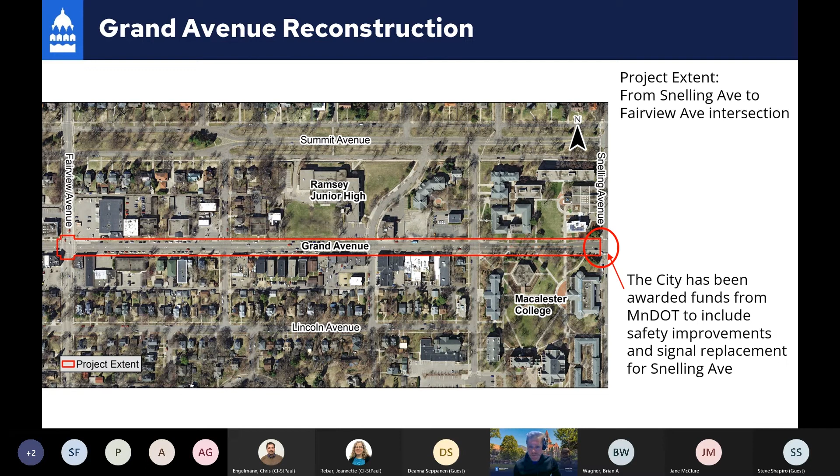Real quick, back to the basics again. I just want to retouch on some of the project needs and goals for why we are doing this project at this part of Grand Avenue.

The project need—one of the bigger drivers—is the low pavement quality throughout the project extent. Part of this project goes through Macalester College, and part of the street roadway there was failing a few years ago, so we did a quick fix on some parts of this section because of the failing state of the roadway. So we're coming back now to do reconstruction, a more permanent fix of some of this roadway that is very poor throughout the project extent.

Another big driver of this project is very high pedestrian activity and pedestrian safety, specifically through the corridor. Looking at Macalester College, we'll see some of these numbers, but pedestrian activity through Macalester College is very high, much higher than a lot of other areas of the city. That's a big driver of why we're looking at this part of Grand Avenue to start our reconstruction process for the street.

Also, of course, there's aging underground infrastructure. A lot of the infrastructure—water pipes, sewer pipes, electric wires, fiber, anything underground—a lot of that's really aging, and it's time for the city to come in and replace a lot of that. Specifically, water and sewer pipes have been there potentially for 50, 60, 70 years at this point, so it's time for the city to come through and start replacing and repairing this underground infrastructure.

Some of the project goals we're really looking to get out of this: we're really looking to improve safety along the corridor. Grand Avenue, we did a safety study with MnDOT about 6 years ago, and Grand Avenue is one of those corridors in the city identified for infrastructure improvements to improve safety, and that's a big driver of what we're doing here today.

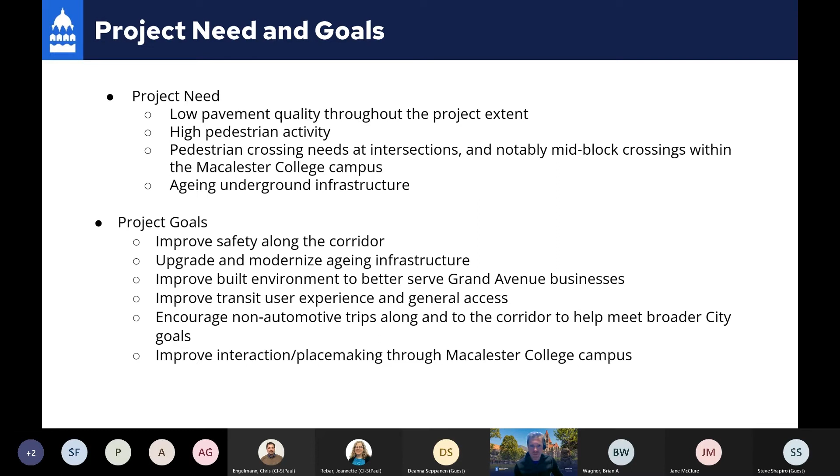Finally, as we talk about Macalester campus specifically, we're really looking to improve the interaction and that placemaking idea through Macalester's campus, and help Grand Avenue become part of campus rather than being a barrier, as many students and people perceive it as today.

A little project background: moving to what we've done so far to get to this point. Our phase 1 engagement ran from about March to July of this year, and included multiple meetings with corridor stakeholders, including Macalester College, Hidden River Junior High on Cambridge Street, Metro Transit, MnDOT, and area businesses. I've met with many area businesses through this process as well, and we also held our first open house in June, which had members of the public attend, similar to today.

We've also done online surveys and interactive mapping tools in this first phase. Those surveys saw about 260 responses to our general survey, getting general ideas about how people use and want to use Grand Avenue and what they want to see for its future. We got 60 Macalester students specifically responding to a survey about the crossings at Macalester, and about 150 interactive mapping tool responses, letting residents drop pins on a map to say exactly what the issue was or what they liked about a certain aspect of the corridor in a certain location.

All in all, through all these activities—in person, online, virtually, small meetings, large meetings—we got over 500 members of the public to engage through this initial phase of the process, and that really did help drive the look of the concept plan you'll see in a little bit.

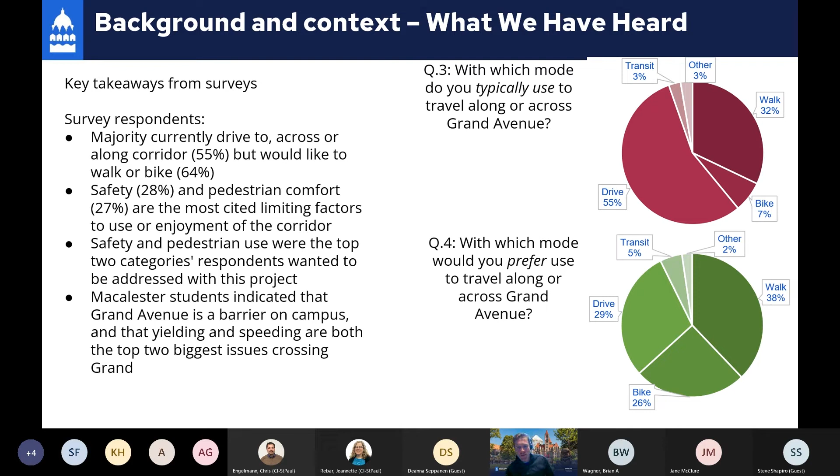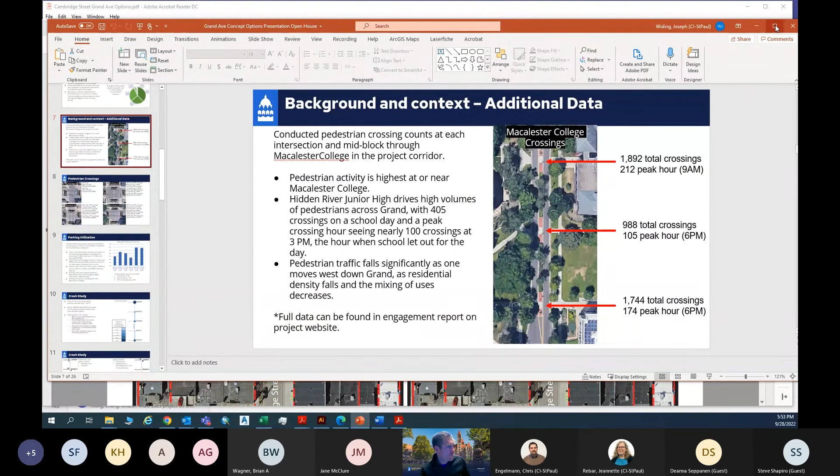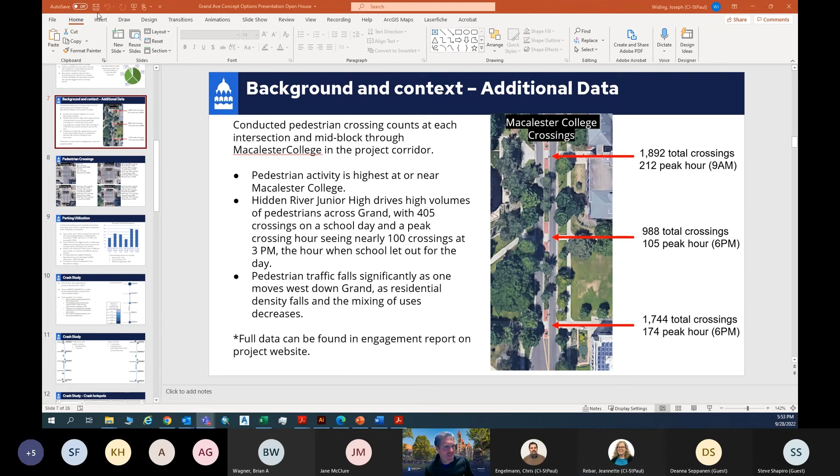I lost my presentation. Jeanette, do you see my presentation still? No, we're not seeing your PowerPoint. Okay, that just turned off on me, one second, sorry about that, technical difficulties here, I'm going to just share my screen. We see it now. Okay. Yeah, I don't know, PowerPoint Live just stopped, so I don't think I'll do that again, at least not tonight, so let's go through this. That's okay, maybe just start the slideshow. You see that? Yeah, we're seeing it, but it's still just the PowerPoint, not presentation mode, but I think it's fine. Yeah, we should see it. There we go, now we're good.

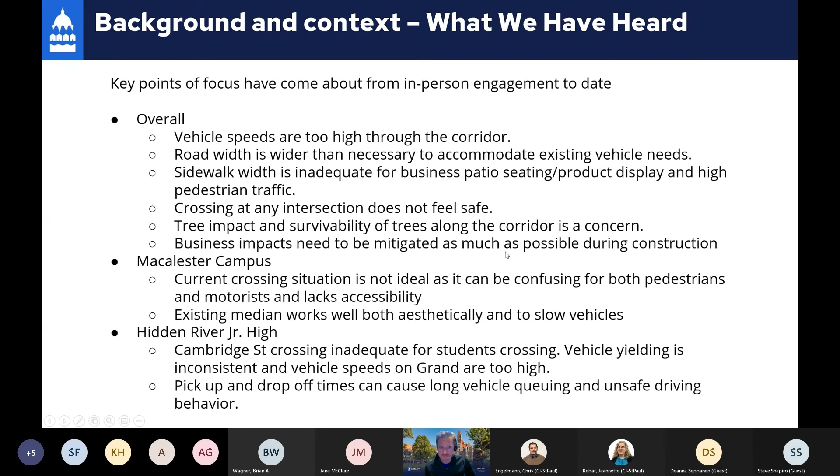Okay, sorry about that, moving on. Where were we? So, pedestrian traffic across Grand Avenue today — we went out there during a typical day on campus last April before classes let out. This is a typical day of pedestrian traffic across Grand Avenue through campus, and volumes here are very, very high.

These volumes we don't really see anywhere else in the city at any of the crosswalks. So this is a very important data tool for us to figure out what's actually happening out here. There seem to be quite a lot of crossings, so these mid-block crossings are very well used, and as we move forward we really need to see how to incorporate this into our design of Grand Avenue.

Pedestrian activity is highest at Macalester College, and as you move away from it, heading west towards Fairview, pedestrian activity drops off pretty quickly. However, Hidden River Junior High does drive high volumes of pedestrians across Grand Avenue, with about 405 crossings on a typical school day. In the peak crossing hour, we saw nearly 100 crossings at 3 p.m., about 88, a lot of those being junior high students letting out from school.

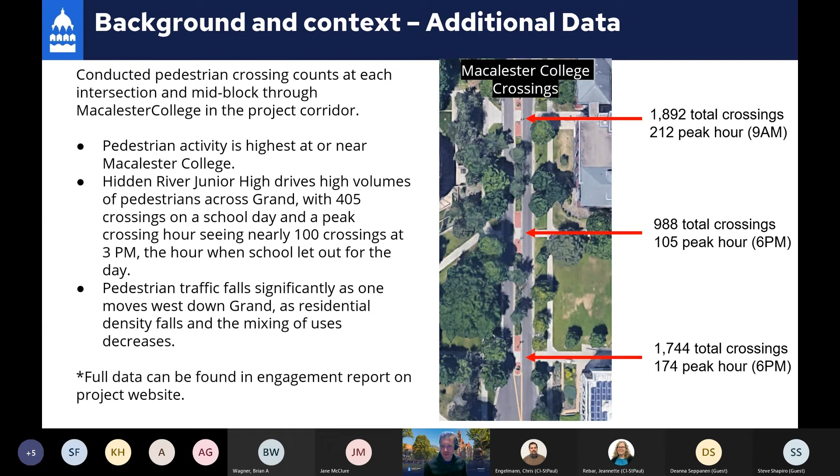That full data can be found on our project website. Just to quickly show some of the other volumes we took for the rest of the corridor: at Cambridge, 405 crossings on that west leg, the leg students use to get to and from school, with 88 in that peak hour.

Snelling and Macalester Street also saw pretty significant crossing numbers. On Snelling Avenue, we had over 500 crossings at every single crossing point at the intersection, with a peak on the south leg — that's where the A-line stations are — about 805 crossings, with a peak hour of nearly 100 crossings. So significant pedestrian activity on Snelling and also on Macalester, likely some spillover from Macalester College. Again, all those crossing legs saw more than 500 crossings each, with a peak of about 730 on the north leg, which crosses on the north side of Grand.

Fairview has significantly less pedestrian activity, which makes sense as you're further away from those activity centers. However, we did see some activity, especially people going to and from the theater, going to CVS, and those kinds of small businesses. You did see some consistent pedestrian activity through here. That is something to note.

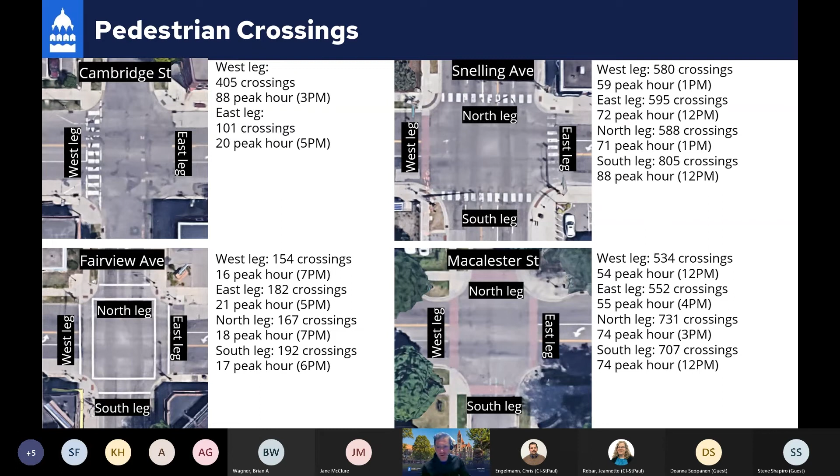We also did parking data through the corridor. We went out from early May to early June and did about 10 to 12 different counts, looking at both Grand Avenue itself and the intersecting corridors that have parking available to the public. We took counts in the morning, afternoon, and evening to get a broad idea of if there are any peaks or valleys of when that parking is more or less utilized. We really saw that Grand Avenue has higher peaks in the afternoon and evening occupancy than the corridor as a whole when including those cross streets. So Grand Avenue itself has seen a lot more parking activity, which makes sense—you've got the businesses, you've got destinations for people to go to. So that fits with what we're thinking here as far as parking goes.

Peaks in the afternoon time frame are at about 45% average for the corridor as a whole, and about 60% for Grand Avenue itself. So those peaks on Grand are much higher than if you include the cross streets. However, even on Grand Avenue, there's quite a bit of disparity between where parking is heaviest and lightest. Parking utilization is highest between Macalester Street and Cambridge Street, where a lot of the businesses are that we all like to attend—Patagonia, those kinds of businesses. You see 83% usage in the afternoon and 78% in the evening for that block specifically. As you move west, similar to pedestrian traffic, it drops pretty precipitously as you get closer to Fairview. But in that one block, we've got nearly full use of that parking, which anyone who's tried to park there is well aware of.

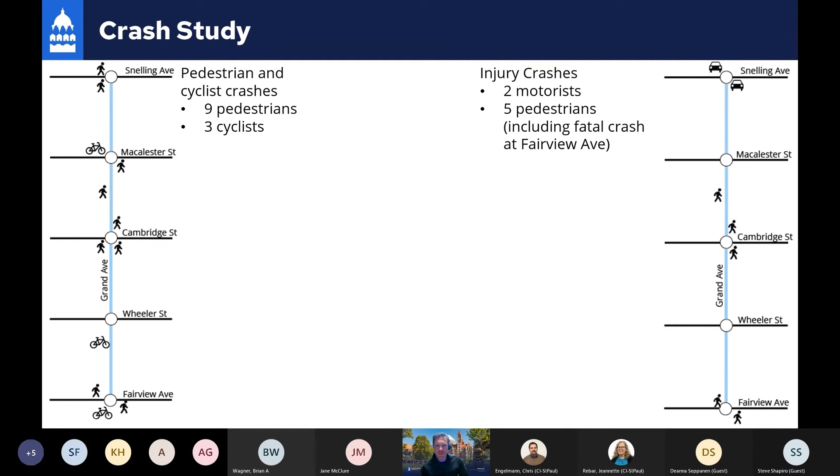So that's kind of the idea of the crash study here, just getting us an idea of where these crashes are concentrated and where we should really be focusing our safety investments as we move forward with reconstruction.

You see here Fairview, Cambridge, and Snelling come out as crash hotspots, where most of the incidents were taking place. I'd like to note one thing on the Macalester campus, between Macalester and Snelling. We've got 5,000 students crossing every day, and about 7,000 vehicles driving through, yet we didn't see a single pedestrian crash in the last decade through this part of the corridor.

With all the data thrown out there, I'm now going to jump into the concept design and some of these location options that we are looking for feedback on from our attendees today and from any residents or anyone who actually uses Grand Avenue as a corridor.

So real quick, this is the overall concept design. As you can see, more in-depth images are on our website where you can zoom in and look at specifics of any of these locations or options. Today we'll go over a general overview, and in the question and answer session I can pull up more specific, closer zoom-ins.

But for right now, the curb-to-curb width is going to be narrowed from 56 feet to 48 feet. That will result in a reduction of the roadway width, 8 feet and 4 feet on both sides. That 4 feet will be returned to boulevard and pedestrian space on the corners and edges, so that total non-vehicle space will be widened from 24 feet to 32 feet.

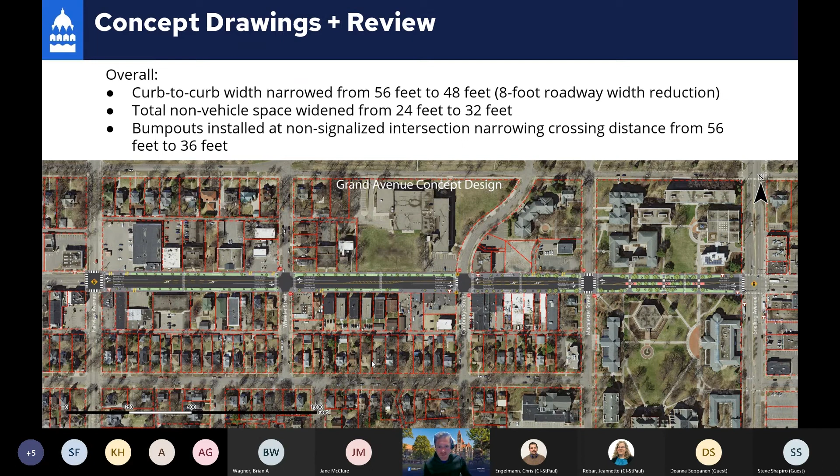Another overall concept design of the corridor is bump outs are going to be installed at all non-signalized intersections, narrowing the crossing distance from 56 feet previously to 36 feet in the crossing areas. That would be Wheeler Street, potentially Cambridge Street, and then Macalester Street as well.

And then our typical concept cross section will narrow those travel lanes to 11 feet, narrow that parking lane to 8 feet, and keep that median turn lane at 10 feet. This shows that it all still can fit without really changing the operation of the street at all. What that does mean is we'll be able to get some additional boulevard space.

Again, looking at tree health and tree survivability, the more space they have to collect water, and not be covered by asphalt and concrete, the more healthy and vibrant they'll be. So in those residential areas, we're looking at a potential 10-foot buffer, which will include all that green space and also keep a 6-foot walk.

In the commercial areas, in front of the businesses, that grass buffer space will turn more into sidewalk, increasing your patio width if you have outdoor seating, or increasing your product display area by 4 feet in front of your business. So considerably more room to operate for those who are walking or using the street for anything other than driving a car, while keeping basic vehicle operations the same.

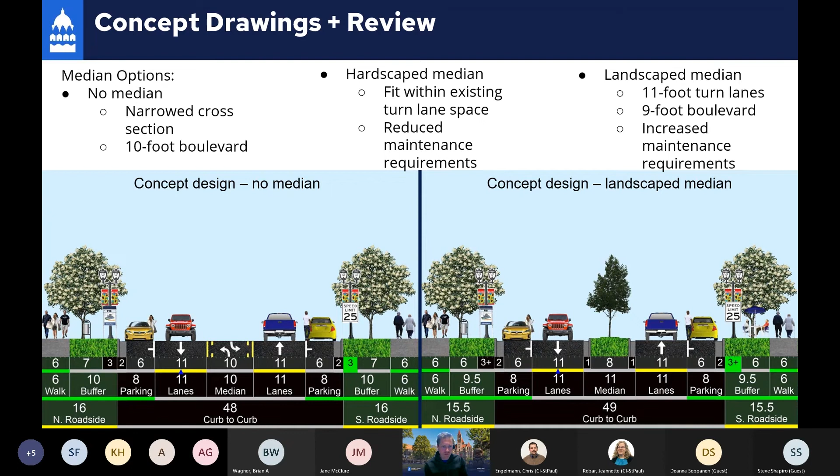So just to show you a cross section of what this could look like: on the left here is what the concept would look like with no median. Again, we've got that center turn lane, which is potentially empty, but just asphalt. And then with the trees, with the center median as a landscape median, it would look like that—we'd have some green space in the middle. We lose a little bit of the boulevard on each side, but that'd be made up by additional green space in the middle. So just some trade-offs to consider.

Our first intersection option here would be Fairview Avenue. Fairview is one of the streets we've seen higher pedestrian injury, including the one fatality in the corridor. So there are 2 options here: keep the same design as today with that narrowed cross section, giving room for cars to take rights and get out of traffic onto Fairview and ease that traffic burden, or install curb extensions, or bump outs, to narrow those crossing points, which would increase pedestrian safety but would also have potentially some bus stop impacts.

Because our bump out would need to be tapered back into the curb in the mid-block section, we would have to move those bus stops further mid-block, about 18 feet from where they are today. That could potentially mean a parking spot or 2 lost at this intersection if the bus station needs to move far enough—not significant losses, but potentially a spot or 2. However, we're reducing that crossing distance from 48 feet to 36 feet, so significantly safer for pedestrians to get across. Those are the trade-offs there.

First multi-option area here. Going back to Cambridge Street, we've got Hidden River Junior High here, and we have pretty significant numbers of middle schoolers and junior high students going to and from class in the mornings and evenings, so we're looking at potentially ways to increase safety here.

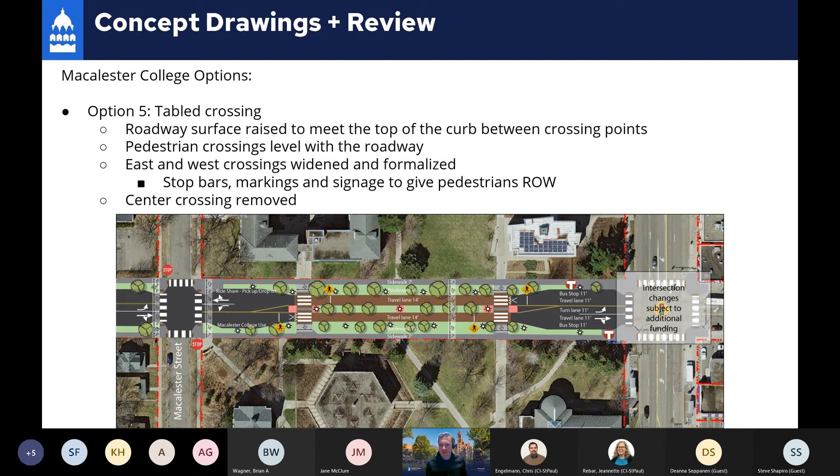Again, that would be the idea of the roadway going up to the pedestrian area, with pedestrians being higher up. Cars must go up into the pedestrian area rather than pedestrians going down to the vehicle area. This option would also see the center crossing removed.

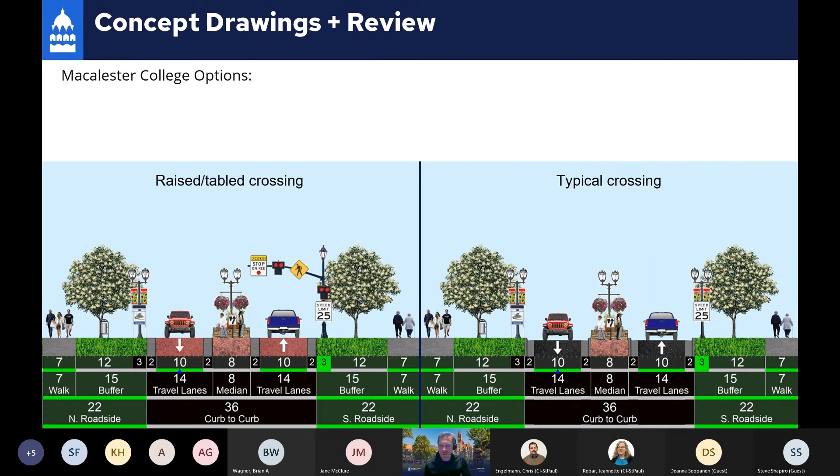So those are 5 options for Macalester. Those are all the options for the different areas.

Just real quick before I open it up to some Q&A, some upcoming potential events you might be interested in. So today's the public open house. Next Monday we'll be going to the St. Paul Planning Commission to talk to the Transportation Committee about these same options. We'll also be going to Macalester College for a little open house event on Tuesday next week. And then there's a Macalester Groveland Business Roundtable — so any business people here today, that's coming up on the 18th, where we get a little more one-on-one time to talk about business needs through the corridor and how these concepts do or do not help them.

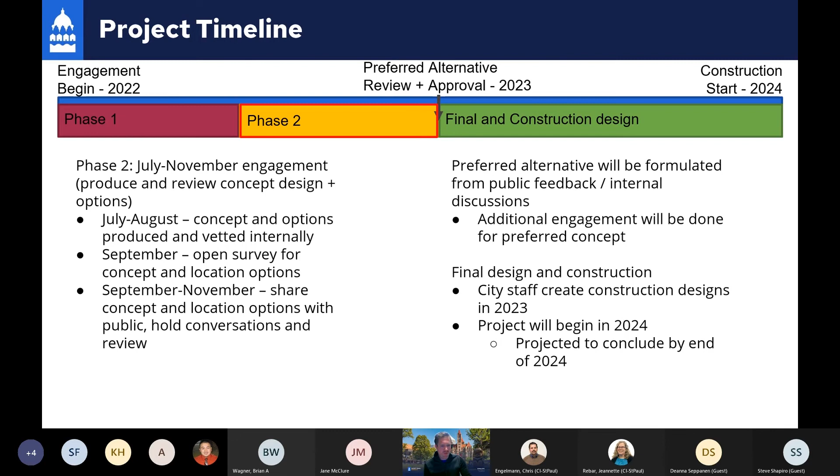Again, run real quick through the project timeline. We're moving now through phase 2, which kicked off in July and will run through November. Once we collect all this feedback and data throughout the second phase of the design process, we'll move to formulate a preferred alternative, including internal discussions about needs and requirements from our own city staff and other agencies. Once we get that preferred alternative, we'll come back with more of an unveiling of it, then get feedback before moving into construction design in 2023 and 2024, when the project will be constructed in the 2024 construction season.

So with that, I will open it up to questions. I'll also say if you want to give feedback online, we have a survey with more detailed drawings, easier to zoom in and get an idea of the lane widths and other details, on our project website. Or you can reach out to me anytime by email or phone call — I think my phone number is on the website as well. But with that, I'd like to open it up to any questions or feedback from anyone.

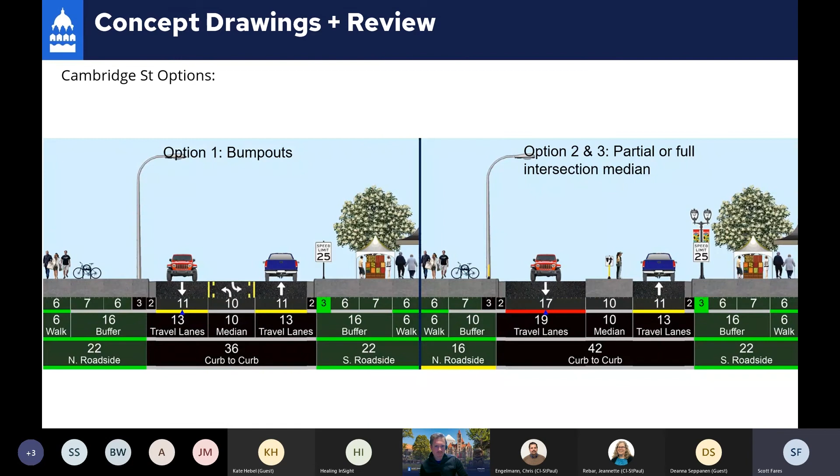My first thought was I had a little concern about the medians and how they affect people exiting their parking on the curb. I drive Grand every day, and what I see is a lot of cars exiting the curb, delivery vehicles double parking. There are a lot of reasons people are moving into that middle turn lane section, from Fairview all the way through this entire run. By putting a median in there, are we potentially creating a traffic jam or an unsafe situation for people exiting the curb?

Scott, that's a good point and a good question. Certainly if there was a median there, with one of these two options, you'd have less room to maneuver. I heard a similar comment about bikes at the Macalester Groveland Transportation Committee meeting earlier this week, and that's a concern for bikes, for vehicles, for parking vehicles getting out of their spots, for loading and unloading.

Specifically as you get closer to Cambridge with the median, the median would cut out quite a distance away, about 150 to 200 feet from the actual intersection start. So you'd be quite a bit of distance from where the median is to the intersection point. However, in that mid-block, I think there'd potentially be some space issues if you've got vehicles moving in and out, doors opening, vehicles trying to get around each other, cyclists going down Grand Avenue. If we go with one of these median options, that's something we'll be closely monitoring and working out through that process.

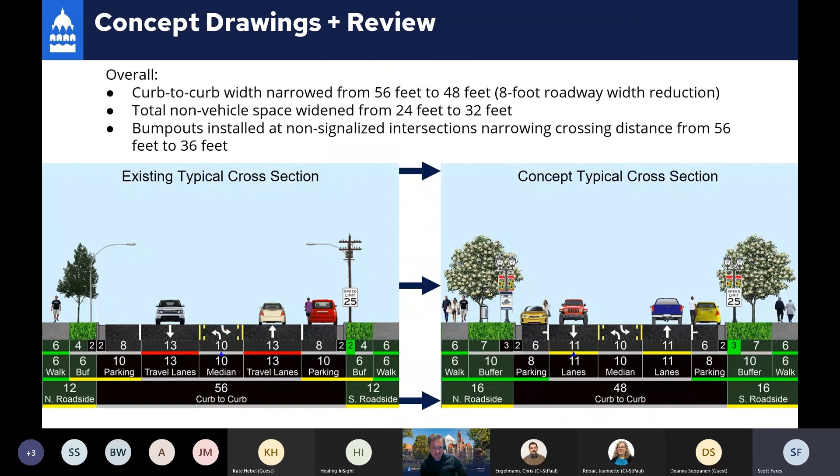The options 1 and 2, I sent you this as an email as well, Joe. Options 1 and 2 both do something that is long overdue, which is add more protection for the students crossing right there at the West Cambridge intersection.

Option 3, I think, creates some concerns because without a left-hand turn off of Grand, all the traffic coming to destinations on Grand from 94 is going to have to drive past their destination. And I think it's going to create some distraction, because people will say, I followed MapQuest and I can see where I'm going, but I can't get there. They'll be distracted while coming through one of our most critical intersections.

So I don't know if that helps a lot. And the first thing they're going to want to do is U-turn. And I really don't want to encourage U-turns on Grand.

That's a very good observation. As I've been on Grand quite a bit this last couple months, I've noticed people already U-turn quite a bit already. So, as you're saying, do we really want to encourage more U-turning? I think that's a good, valid point to make about that third option. I do appreciate that comment.

Having gone to places where medians are in place, you realize, well, Marshall would be an example. If you are not native to the area and aren't aware of where the breaks in the median are, you end up driving past your destination a lot. I think for Grand Avenue, inviting people from all over the region to visit us for the first time, having irregularly open intersections is more than challenging. It actually makes people unhappy.

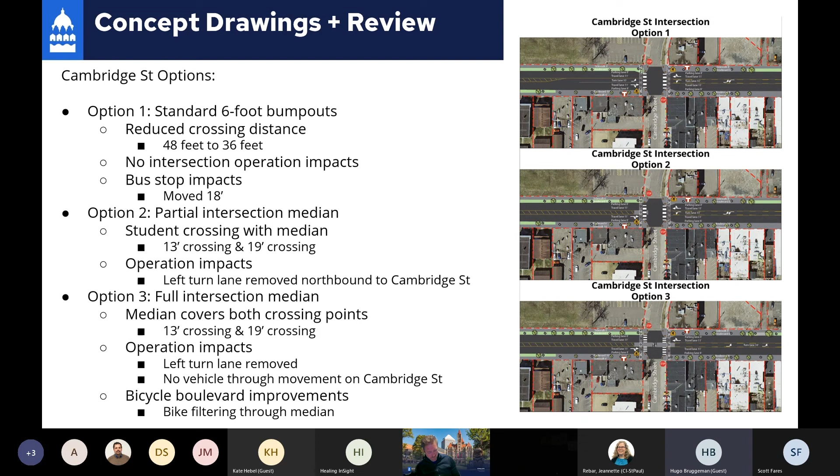It seems like when you look at the current use of the parking, there's a need for people to park there for a short time and pick up a meal and drop it off. If it's 5-minute parking, that should be plenty. So I was wondering whether you're also planning to designate the parking on Grand in front of the businesses and mark them for different usage, like scooters, e-scooters, other e-vehicles that people will likely be using in the next 10 years, as well as services that pick up and drop off meals. So, 21st century parking needs—will they be covered? Thanks.

Great question, Hugo. Thanks for listening to me again. You just listened to me for about an hour and a half a couple days ago, so thanks for coming back.

Great question. In those areas where you've got quite a bit of parking usage today, I believe there's 2-hour parking through most of the corridor, especially on that block between Macalester and Cambridge. That's maybe longer than what a lot of people would use it for. Specifically on signage and who can or won't be able to park there, I think that's a question we can explore more as we move forward.

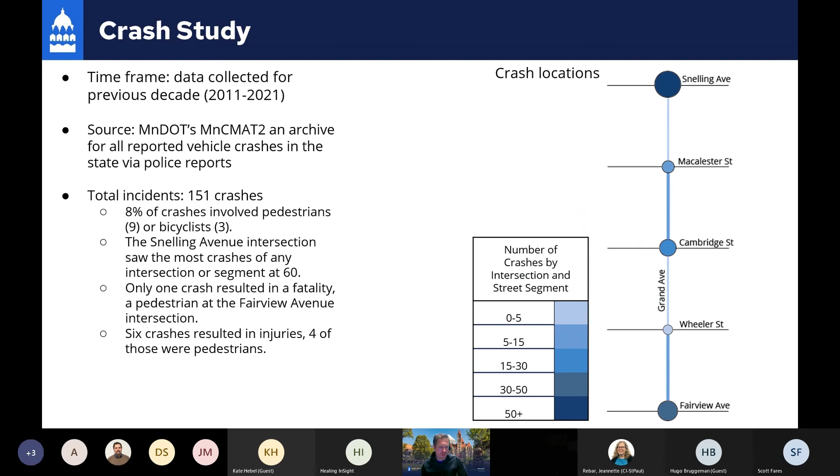I think the idea here today is just showing the space that will be there. There will still be parking spaces, a little narrower than today, but still there. What that looks like is still an open question. That's definitely part of our business engagement—speaking to businesses, asking what they think is the best use of parking specific to certain areas.

One thing I noticed is there are quite a few rideshare pickups and drop-offs, and people getting food delivered—the new pandemic kind of stuff. A lot of deliveries, pickups and drop-offs going on. I did notice some ad hoc parking on Macalester, people not really knowing where to go, just parking wherever they can. So I think one thing we can do through this project is designate these spaces specifically for pickup, drop-off, Uber, Lyft, Bite Squad, those quick in-and-outs that a lot of students at the dorms utilize.

Today it's not really clear what that space is for, and through this process we could make it clearer that this is the place we want certain things to happen, especially on campus. On the other side, Macalester College needs space for the church and other events there, so the southern space will be designated for their use for weddings, funerals, whatever goes on at the church. So we're trying to think about other ideas for what we can do with some of this area.

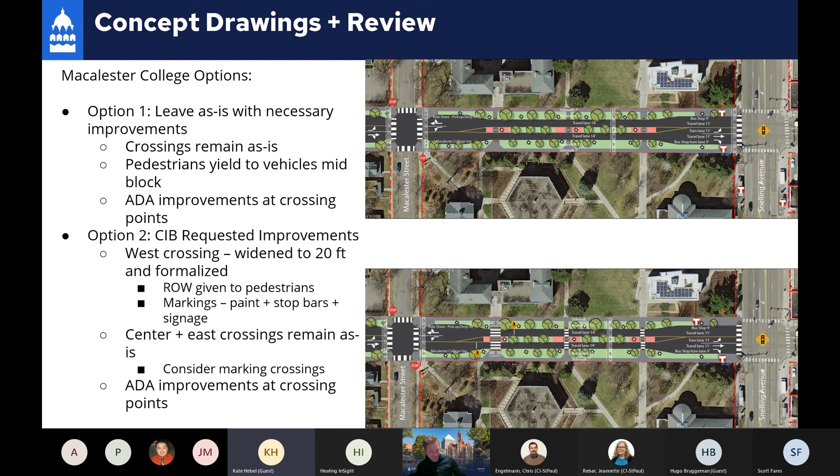One is, I think it's a snowplow nightmare, the medians. All you do is look at Lexington on that one. And also, oftentimes they'll put plants and that kind of thing. But again, look at Lexington from Summit North. It's never taken care of and also looks awful.

But one of the things, Joe, about the trucks that stop in the turn lanes, apparently that's become acceptable practice. What I see happening is just scary, because so many times a truck is stopped there, a FedEx or UPS truck, a big truck, and then you have people jaywalking from like French Meadow to cross, and you're going by them. You have no idea there's a pedestrian behind a truck crossing from south to north.

It is very scary and just an accident waiting to happen. I don't know if something can be changed about those delivery trucks, but it's something I've witnessed, and I think it's pretty scary whether you're the pedestrian or especially the driver.

Okay, that's a great point. From the city's perspective, I'm not in operations or enforcement, so I don't believe it's illegal to unload and load in the center of the road. But I do certainly hear your concern about the safety issues of having a large blind spot in the middle of the block where people could be walking, or a delivery man coming out from the back of the truck. There's a lot of potential safety hazards you mentioned, and we are cognizant of that.

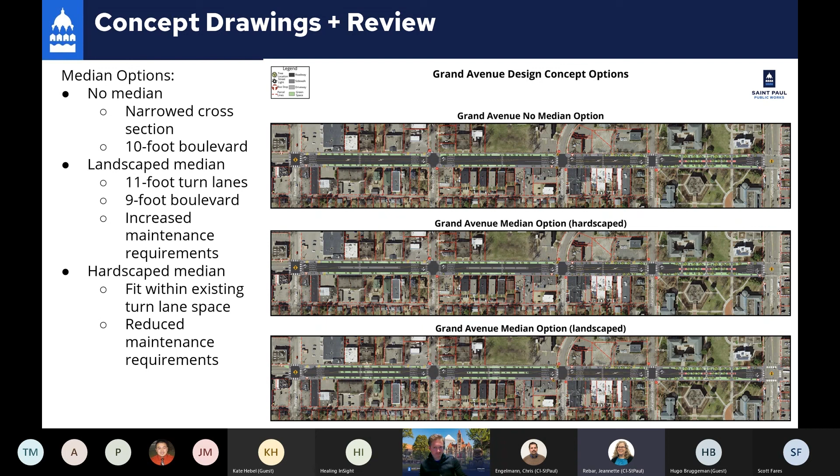All right, I don't see any more hands raised or questions in the chat, but we'll give people another minute. I also just dropped the project website and Joe's contact information into the chat. Feel free, if you don't know how to raise your hand, you can unmute too if you have a question. I have no other questions.